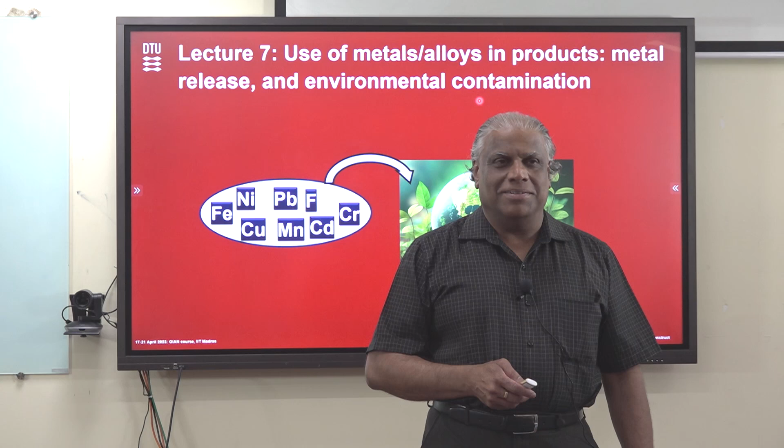So today we'll continue in the same way into some of the other areas. Again, the idea is the same: it's not to learn into details, but just to get an overview, so you know that these are some of the important issues. That's the idea behind it.

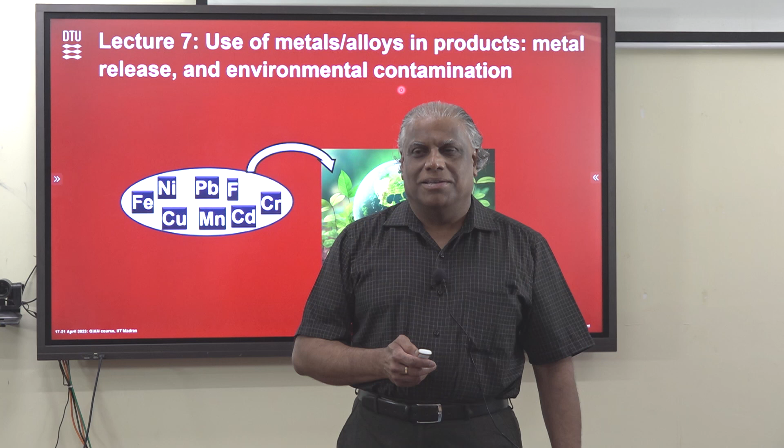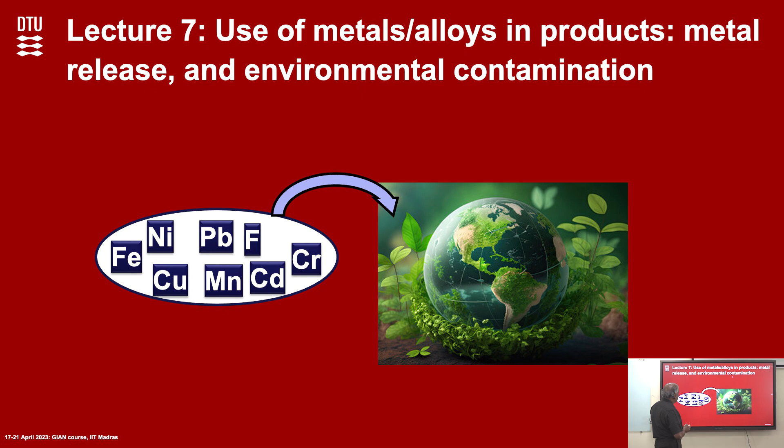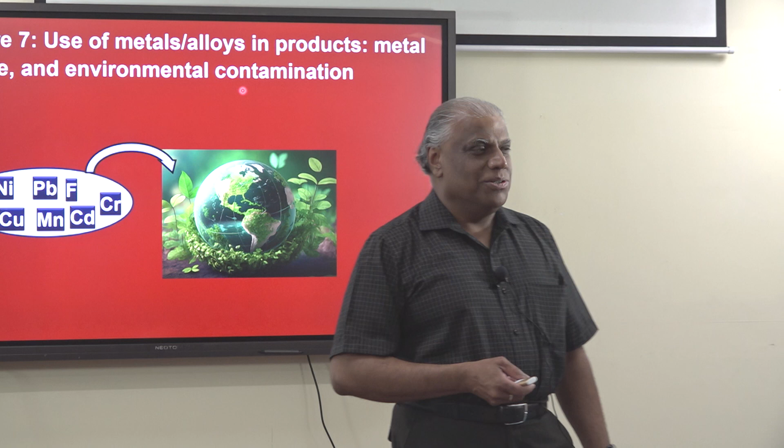So we cover two things today. One is metal release, because in recent times the use of metals and alloys in external products is increasing. If you look many years back at buildings, you don't see so much metal items exposed outside. Maybe in brass things like statues in India, or copper roofing in the West, but not so much other materials were used. But today it's not like that.

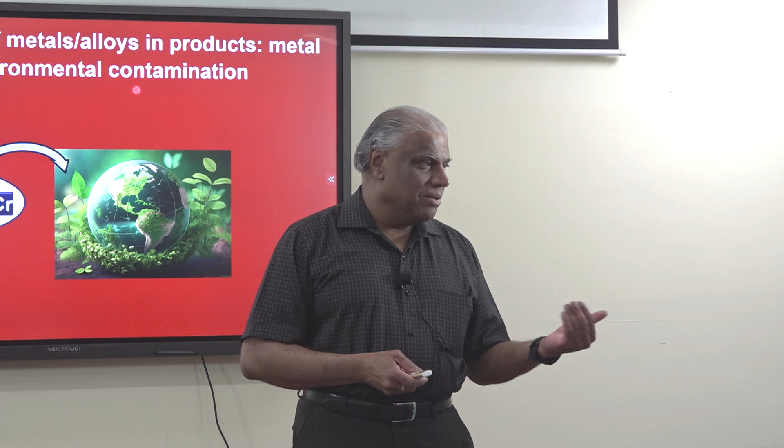Today there are so many metallic components used on the outside of buildings - aluminium, and in a normal building steel is used so much, of different types. There are buildings constructed totally using aluminium, and totally using titanium, and things like that.

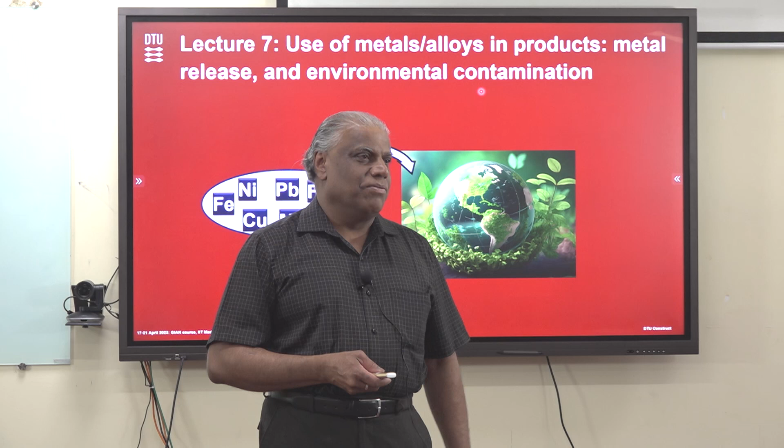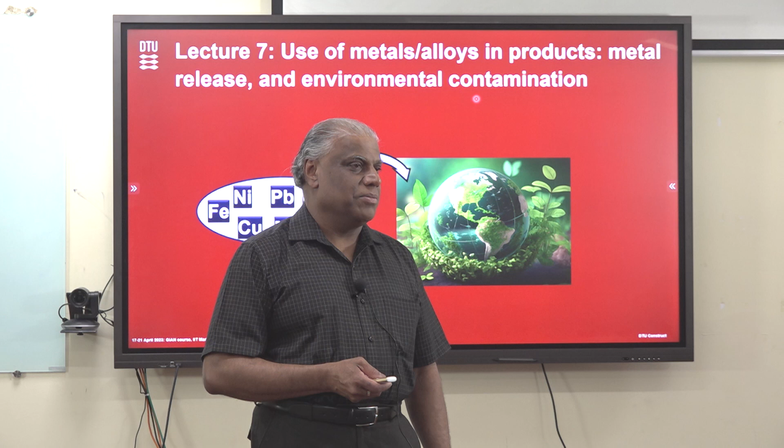Since there is a bigger area of metal and alloys exposed to outside conditions, there is more thinking about what is released from metals into the environment and how that will cause a problem. It can be poisonous. Some of the metal that is released can create problems for microorganisms, and if it creates problems for microorganisms, that means indirectly it will also affect us. So this is the thinking - that way people want to control this release.

Of course there are a few other things as well I will discuss here, to do with metal release also in biological systems - a little bit of an overview, because more and more materials are also used in contact with biological systems, and there too you have the metal release problem. So that's what we are going to look at a little bit.

Mainly the source of the metal is coming from architecture, that is from buildings, but it can also come from other things as well - mining, industrial sector, agriculture - and that can also release metallic ions, which come to the earth and also to the water, and that way it is a problem.

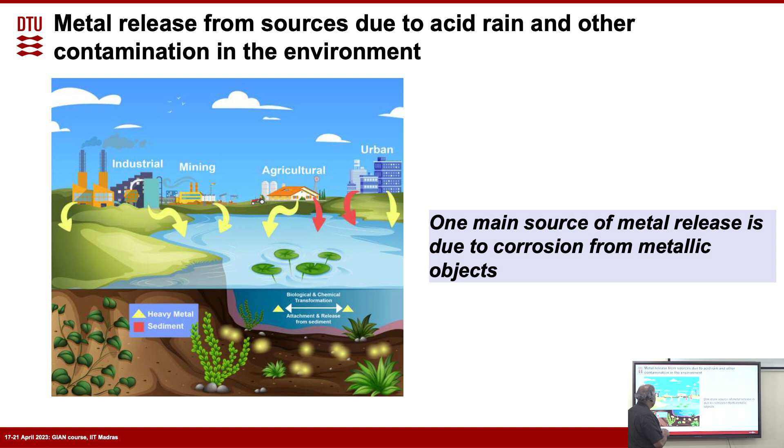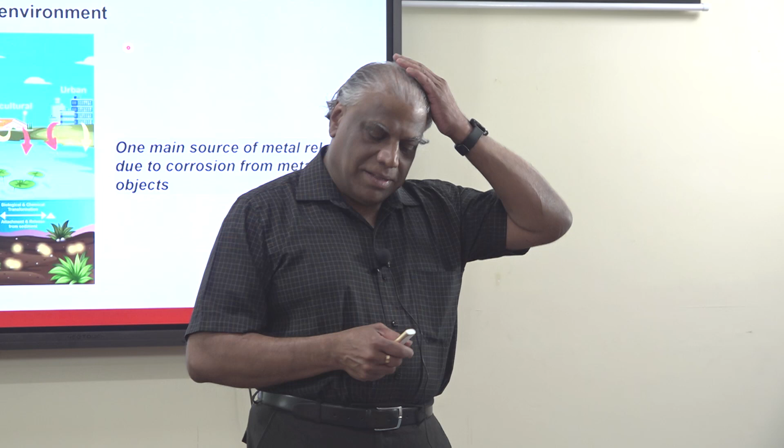But we are more worried about buildings, because in most cases the metal released from buildings is due to corrosion problems. It's a corrosion problem that is causing the metal to release, and that's more interesting for us, so that's what we will look at in more detail.

As I mentioned, the amount of metallic material used in building construction is increasing. You can see that if you take steel, about 43% of the steel is used in the construction sector, and there are many other applications as well. If you take some of these products, they are also getting exposed to the environment, and that way metal release is possible from these applications too.

Although we are taking the building application as the main thing releasing metal ions into the earth - for copper, you can see that the main application is building construction. This particular statistic is from the United States. Maybe there is more copper use in the West, probably compared to India.

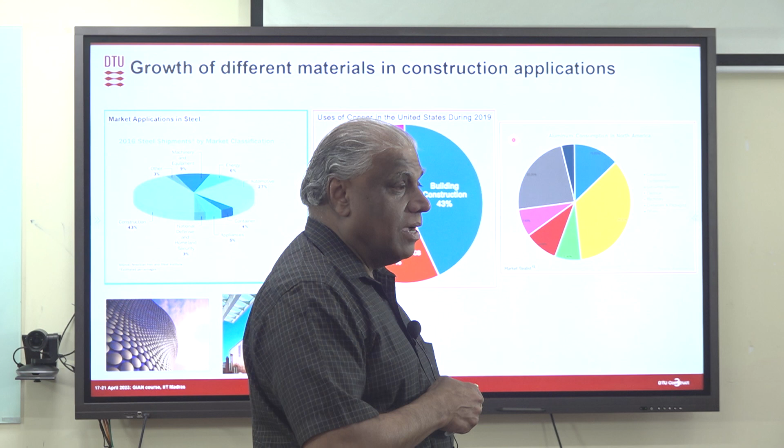Many times you will see that the tubing for water piping systems and other things in the West is made of copper, and roofing as well. So there is more use of copper in the West, and that's probably the reason you see here that a lot of copper is used.

Similarly, if you look at aluminium consumption, this part is coming from construction. The amount of aluminium used is a little lower compared to transportation, shown here in yellow. Transportation is the dominant sector for aluminium because of its lightweight, but aluminium is also used to a large percentage in construction as well.

Aluminium involvement in construction is increasing because of this lightweight property. You might think lightweight isn't important for static applications like construction, but that's not the case, because now we are making very tall, complicated buildings, and to install the metallic components you need cranes.

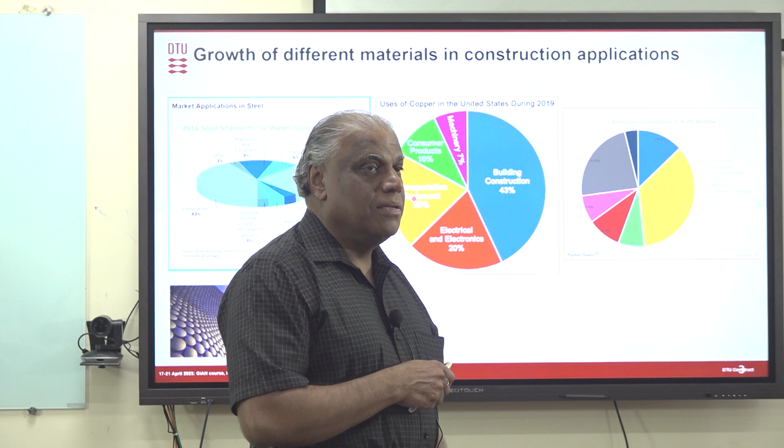Cranes are costly to use, and an aluminium component will weigh only one third of the equivalent steel component, so you don't need heavy cranes and other machinery for installation. So installation cost is much less if you build with aluminium compared to steel. That's why aluminium is entering more and more into construction, especially offshore construction.

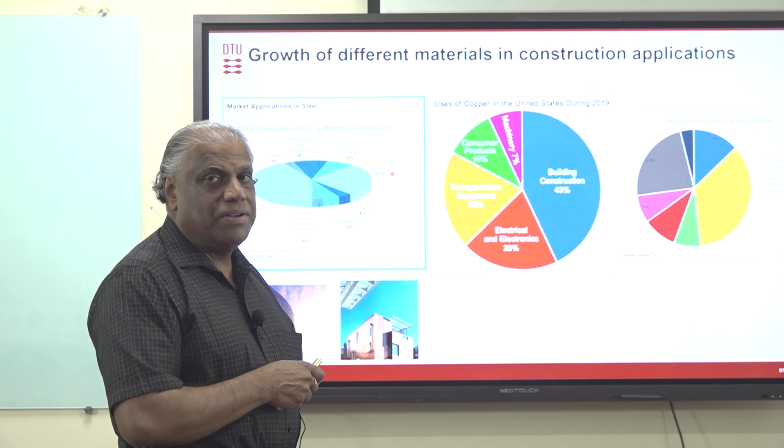Earlier, in offshore oil platforms, mainly steel was used for accommodation modules and similar structures. Now everything is changing to aluminium, basically for this reason—it can be easily transported, which reduces cost.

So just to give an example, I'll take a few different examples of metal release. This is one of the studies people have done on metal release from sources due to acid rain and corrosion.

This is a nice investigation from Guangzhou, a city in southern China with a lot of urbanization and industrialization. The air there is polluted, and that's a real problem because when air is polluted, rainwater collects pollutants like SO2 and NOx gases.

If water reacts with SO2, it produces an acid species, and similarly if it reacts with NOx gases, it also produces an acid species. So these issues are why the pH ends up being lower.

I took this from a paper looking at the dissolution of zinc, copper, lead, and cadmium, for example, and you can see a quite significant amount of this material is released at different sites. We'll look at that in detail shortly.

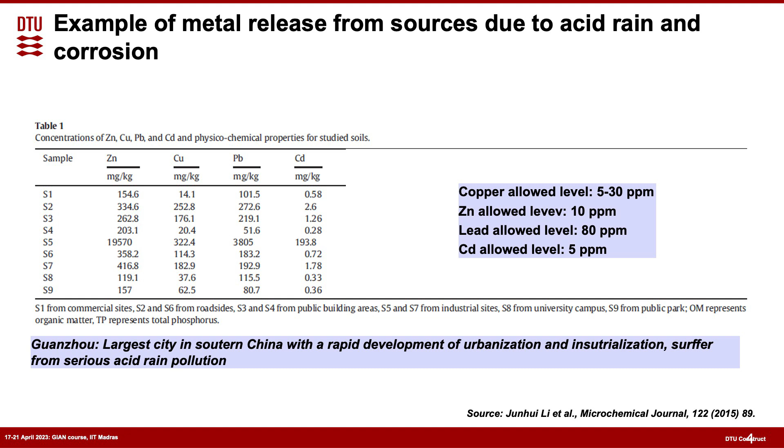So you can clearly see a pattern here depending on the type of place and exposure: where you'd expect higher pollution, such as industrial sites, you get a much higher degree of this release compared to other regions.

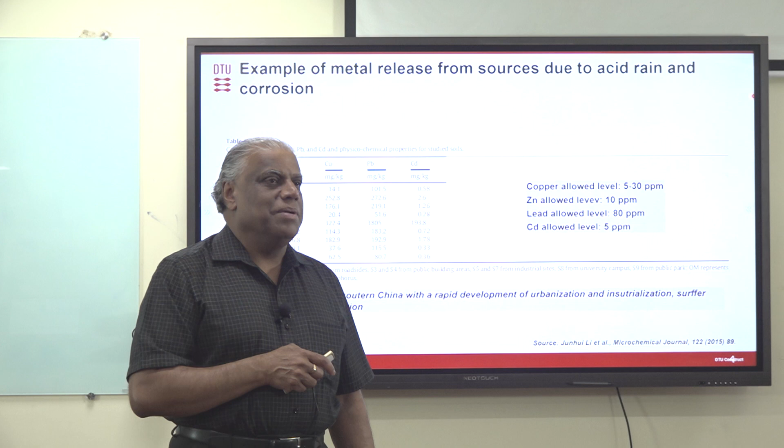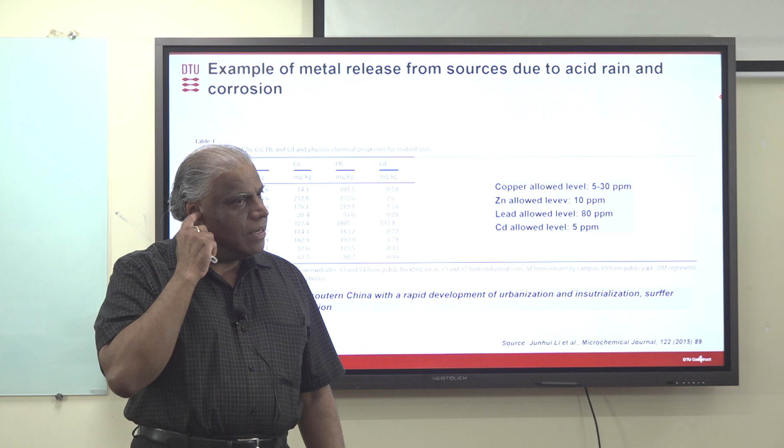This is a side that people are worried about, and this needs to be controlled - that's the kind of action which you need to take. I don't know to what extent you have this thing in India, but at least in the West, it is very seriously taken, and there are strict rules for using metal items for building constructions. One of the universities, which will come later, did a lot of work in this area. They started giving consultations, so that anybody making a building could consult them and get suggestions for better materials to reduce this problem.

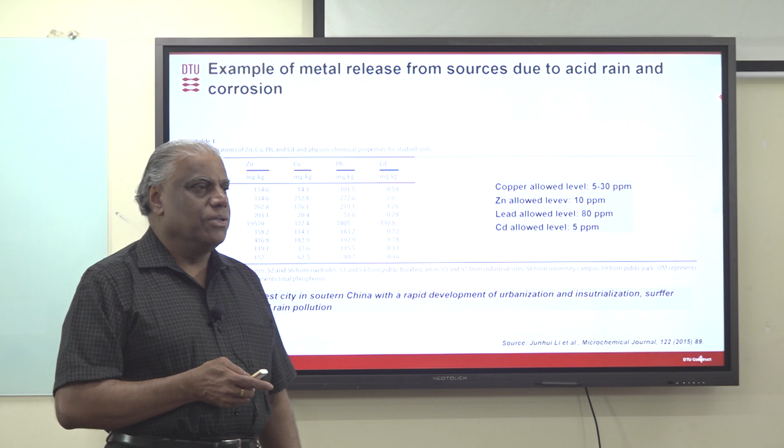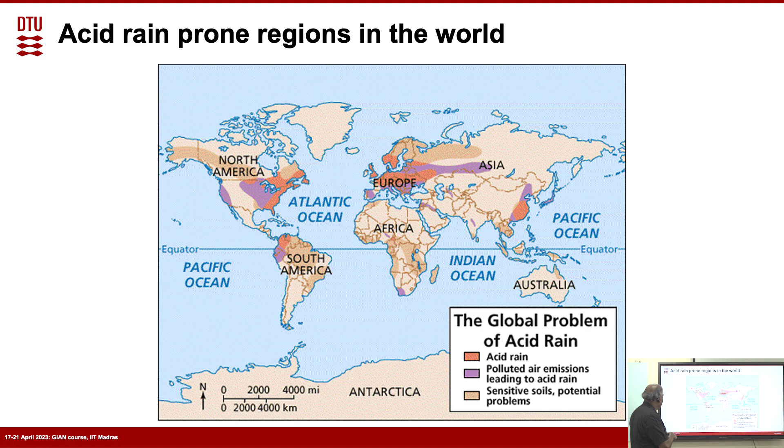But if you look at this graph, you don't see that. Of course, this may be a slightly old graph, so there may be slight changes, but you don't see that here. You can see that Europe is one of the places with a lot of acid rain, and you also see it in North America and part of South America - that's the region where you see a lot of acid rain.

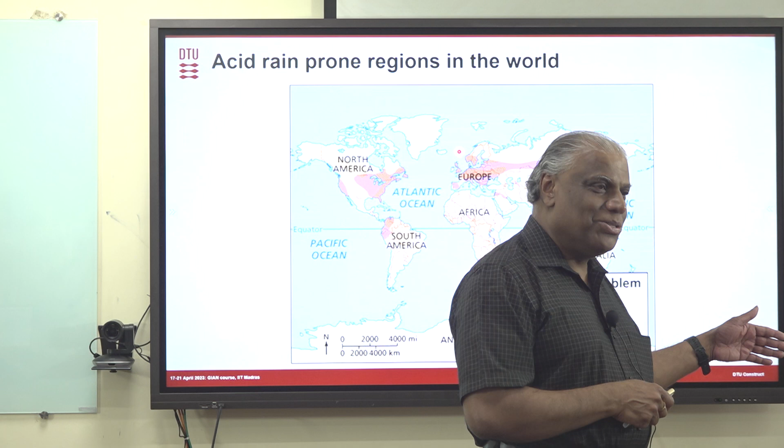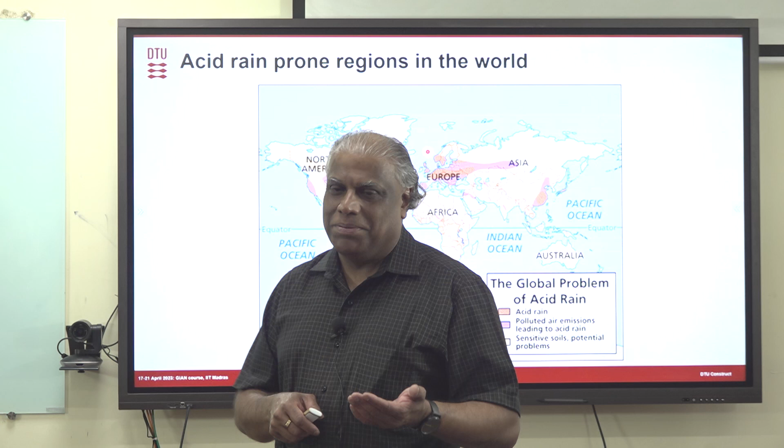So that goes back to history. That means the acid rain you see now is not totally to do with yesterday's pollution - it is coming historically, from over a long period of time. The Industrial Revolution started in Europe, so many industries came up there, and a lot of pollution was already done at that time, because the restrictions were much less then. So that makes much more acid rain.

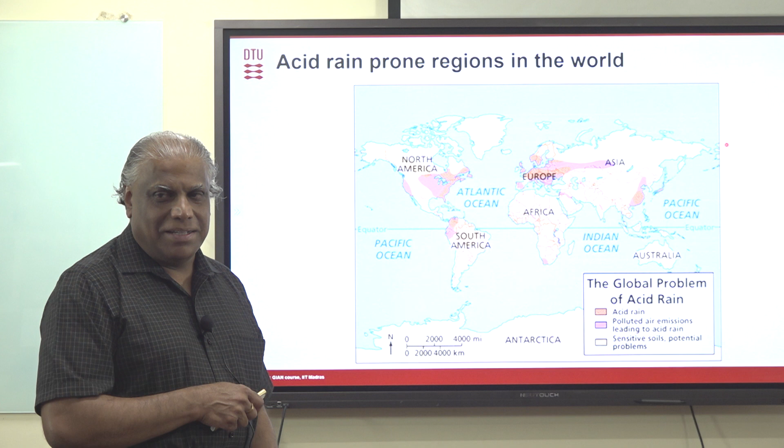So now you can see why Europe is more worried about it, and why there are more acid rain chances in Europe. It is probably coming down now, because over the last many years there have been much more restrictions, and that way the pollution is less, so probably the degree of this is coming down. But in general, there is more pollution and acid rain chances in Europe.

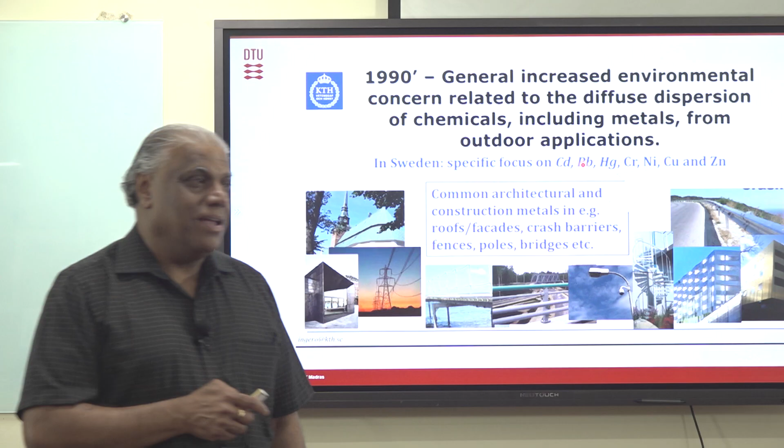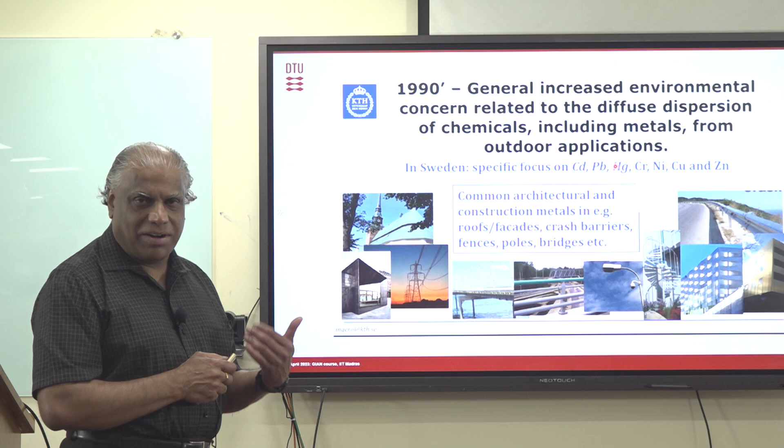KTH has done a lot of study from the corrosion point of view and the electrochemical point of view. KTH is the Royal Institute of Technology in Stockholm - in Swedish it stands for a different name, that's why it's called KTH - but it is like my university, like DTU or IIT. They only have technology, engineering, science and management, not much else. It's a similar type of university, and they have done a lot of work in Europe understanding what kind of metals can release from buildings and what problems that causes. So that's what is written here, I took some slides from them.

Generally, increased environmental concern relates to diffuse dispersion of chemicals, including metals, from outdoor applications. This was the kind of case which came up in Europe within the 80s and 90s, and they did a lot of work in this area, looking into what could come out from different buildings.

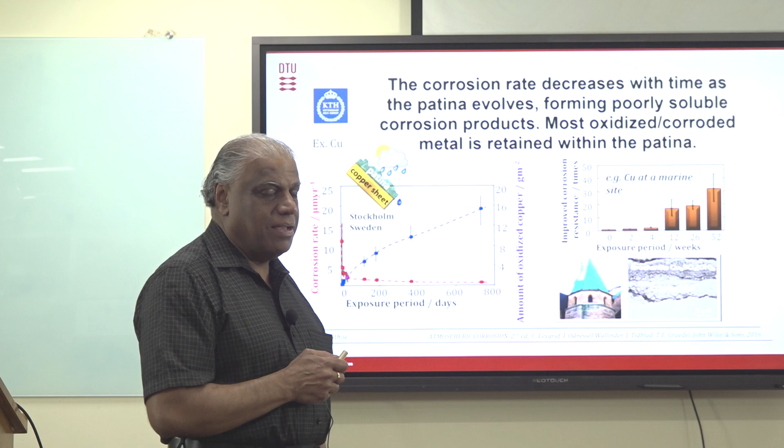One of the major things they studied is the release of copper, because there are a lot of copper roofing buildings in Europe, and it is totally covered with patina. That means the corrosion rate of the copper will be lower with the patina, but the problem is that this patina itself is soluble in lower pH conditions. So it's not that copper is corroding more, because copper is not exposed - the patina is the one exposed to outside conditions, but the patina itself is soluble if the pH is lower.

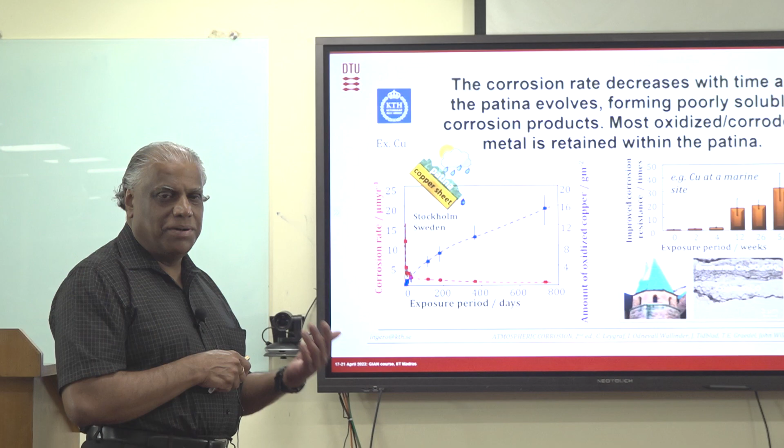So here you can see an experiment they did outside, for example, taking a copper sheet and exposing it from outside for around 800 days - that's about 2 years or more. You can see that the copper oxidation rate comes down very, very fast. And very fast doesn't mean within 1 hour or something like that - within a few days, the copper oxidation rate comes down.

And that is because this patina is forming the amount of oxidized copper. Oxidized copper doesn't mean that's a patina, but at least the oxidized copper is forming, and that is increasing with the time. And this slowly changes into patina, and that's what happens in all these places, if you take this copper roofing. And this is also what it says, that is improved corrosion resistance over time, because this copper dissolution rate is reduced as you have an increase in the corrosion, this patina formation and things like that. So that is naturally what you see in the case of copper, because patina is forming, and that way this dissolution rate is decreased.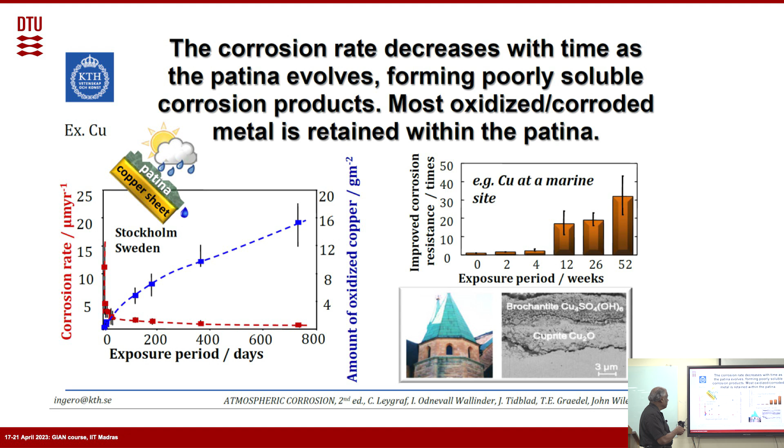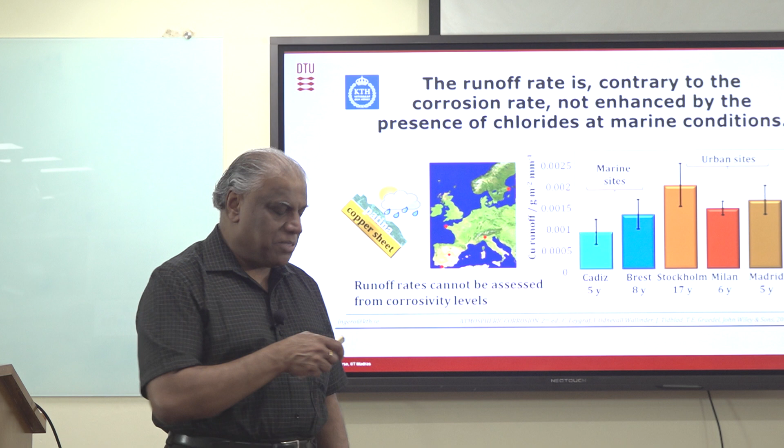The runoff rate is lower in the marine site, because usually we expect the other way. The marine site is having a lot of chloride conditions, and we expect that marine sites will give much more runoff. But here it is opposite. Actually, it is city areas which give much more release. Again, it is coming back to the same thing, because city area is more polluted with cars and things like that, and that way there is much more possibility of acid rain, and much more release in the cities compared to that of the marine sites.

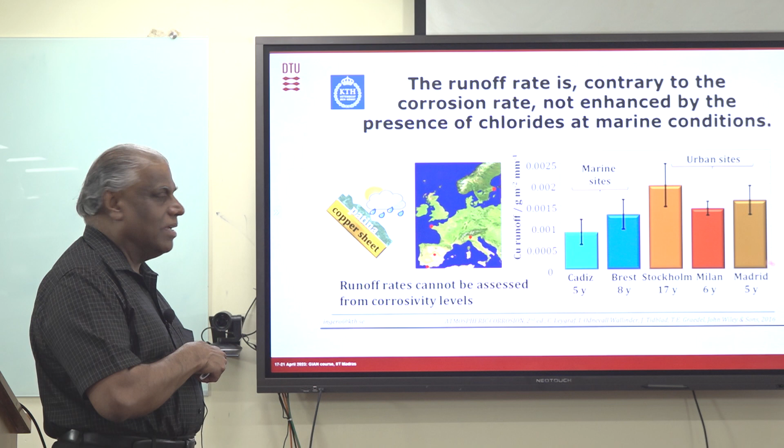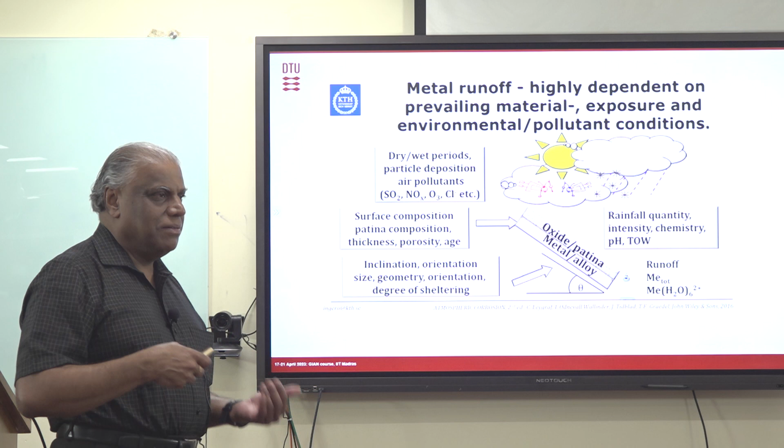So that's the importance of this urban atmospheric conditions you can see here. And then they also found that the metal runoff is highly dependent on the prevailing material exposure and environment pollution conditions. That means the dry-wet period is important. There is a dry-wet period, meaning you have a wet period and probably there is pollution and different things like aerosols that are deposited, and that also contains salt. And then when there is a wet condition, that increases this dissolution - all these gases and other species in the environment is important.

Surface composition of the patina depends on the metal, and the patina composition, porosity, and age - that's important, because if the patina is porous, not only will the patina dissolve, but also the environment will be attacking the copper. I'm taking copper as an example, but the meaning is the same for all metals, and that way again it increases.

Another thing they found was that the inclination is very important. Inclination, orientation, size, geometry - all these are also important, because it is runoff, right? This angle is important in this case. If it's a horizontal case, there is less runoff compared to if it is at a 45-degree angle or something like that the roof is sitting. So there are a number of parameters determining this - it's not just a simple thing.

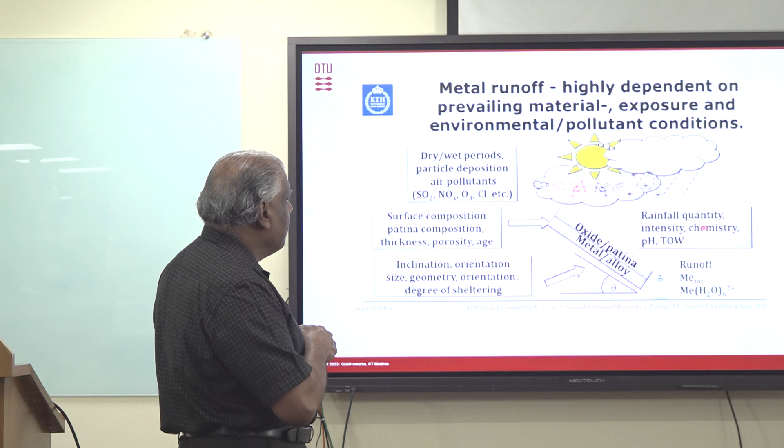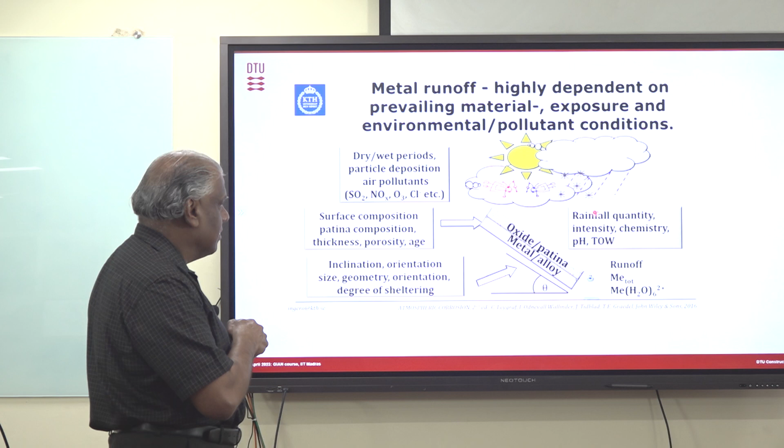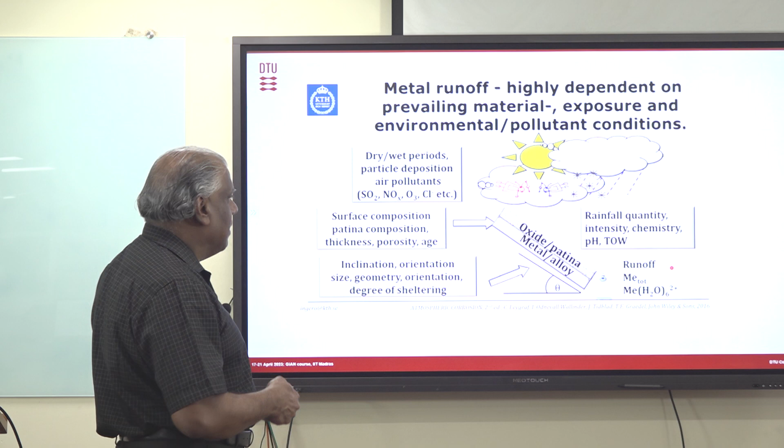And at the end, also the rainfall quantity and intensity, the chemistry of the rainfall - that is basically this acid rain, pH and things like that - and time of wetness. Time of wetness means it's not necessary that all the time you have rain - you have intermittent rain, but in between you have this time of wetness, like condensation. In the morning time you have cold weather, and that way you have condensation on the surface, and the condensation is slowly making the things dissolve. It may not be flowing away, but then when the rainwater comes, it is flowing away. So there are many factors that determine this flow, and that way this contamination.

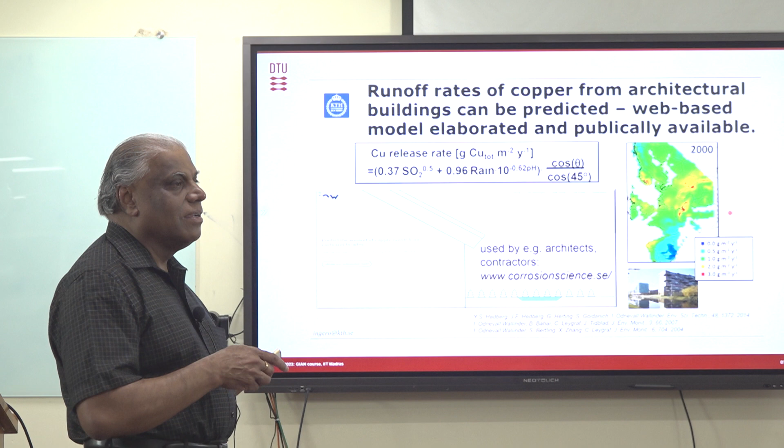Now they also started giving advice. This is a construction project where their knowledge and research findings have been implemented through discussion with material producers, urban construction offices, environment management, and property developers. They use alternate alloys because the designer wants a certain appearance for the outside, so there's a trade-off between what material can be used, how we can control the release, and at the same time getting the targeted appearance.

For example, in this particular case, they originally had the idea of using copper, but instead started using a copper, aluminum, tin, and zinc alloy. That way, the copper release was reduced by 40%. So that's an idea of how, if somebody wants to construct a building using a metallic material for aesthetics, you can reduce the release. This also brings opportunities, because this alloy probably didn't exist before—it was developed as part of this work, bringing opportunities for making new alloys with lower corrosion.

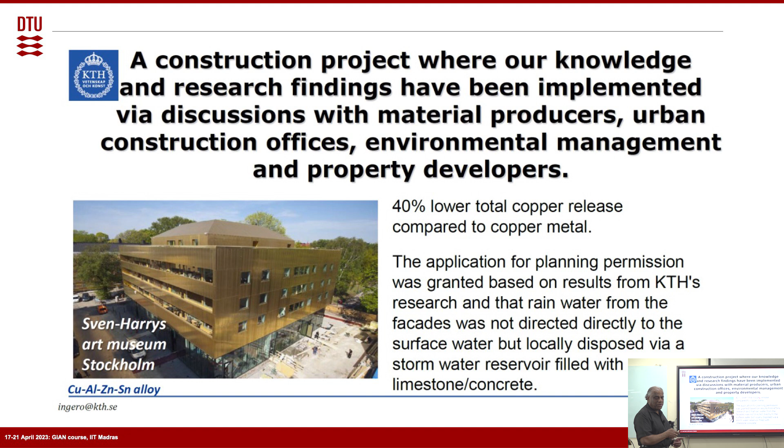So that gives you an idea of how important this is and what people do to understand it. They also studied the zinc runoff from the material, plotting the rate versus exposure period for zinc over about 350 days. You can see there are two data sets here—one is the corrosion data for zinc, and the other is runoff data.

Why these two? As you can see from this picture, because of the environment going through the patina, there is zinc corrosion occurring underneath here. You can also see there is zinc runoff happening on the top, which is coming from the patina dissolved in the acid rain and things like that, shown here for example.

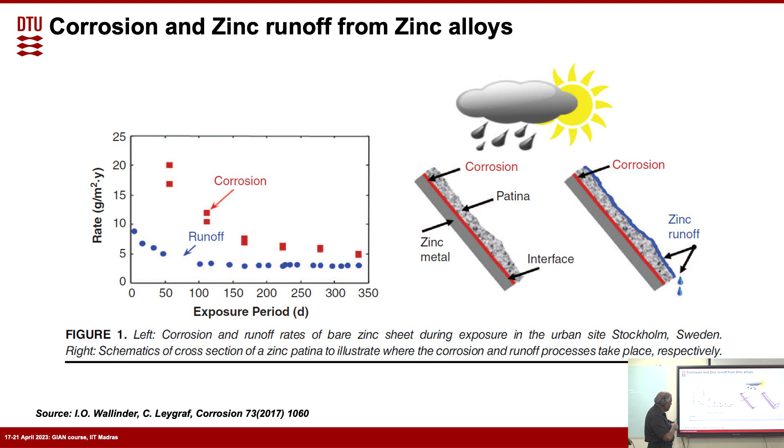This shows the corrosion rate of the zinc. If you take these two together, the zinc corrosion rate is higher initially compared to the runoff rate, because the patina is quite small. But you can see that with time, the zinc corrosion rate and the patina dissolution rate become almost the same, meaning it's reaching a steady state condition. Whatever patina is forming, that patina is dissolved as well.

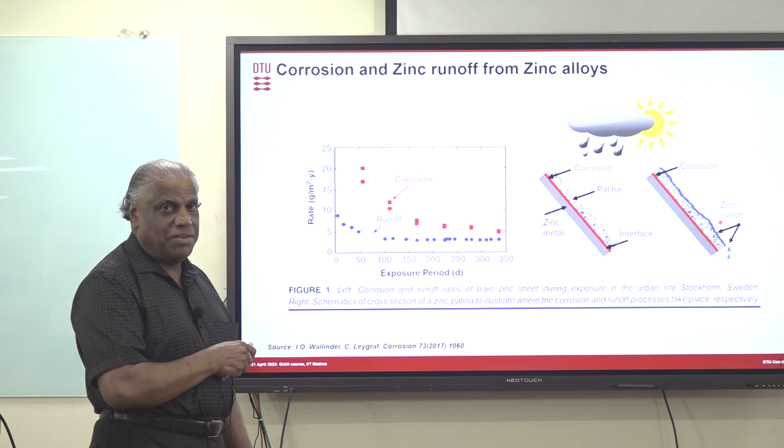A nice situation would be where the patina dissolution rate is lower than the corrosion rate, for example. Here it is equal almost at the end, and that is reaching a kind of steady state condition in this case.

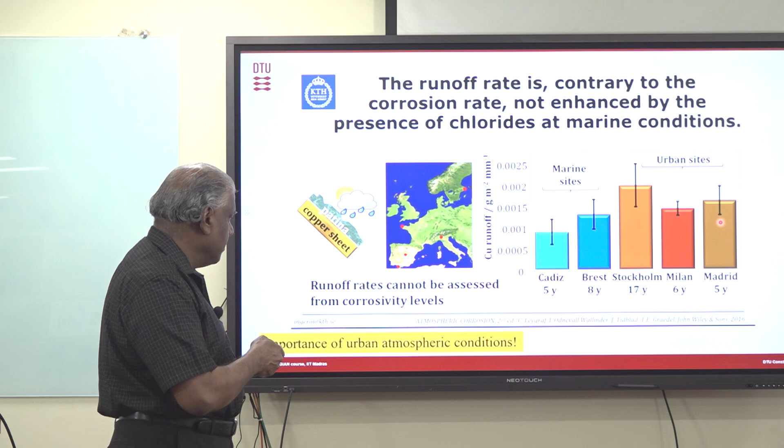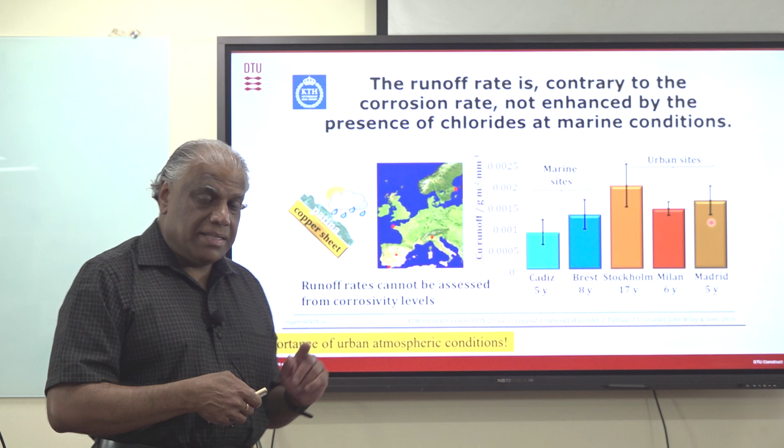This means more awareness and nicer vehicles, better cars and things like that, so the pollution is less, and because that issue is less now, the copper runoff rate has come down in Stockholm. But this is a kind of target, they also want to reduce this further. This is just from the same study, proposing the mechanism of this zinc runoff.

So you have zinc and galvanized zinc, and I think nothing complicated here. Zinc gets converted to zinc hydroxide first, because they analyzed the layer formation with time. Zinc hydroxide gets converted to zinc carbonate and hydroxide because there is carbon dioxide in the air. Then they also found compounds with chloride in it, a hydroxy chloride type compound with zinc chloride, which must be much more soluble in water compared to the other one because of the chloride. Then it forms a sodium salt, and then it dissolves into the water. That's the sequence of product formation: from zinc hydroxide to zinc carbonate, to hydroxy chloride, then forming the sodium salt, which dissolves into solution.

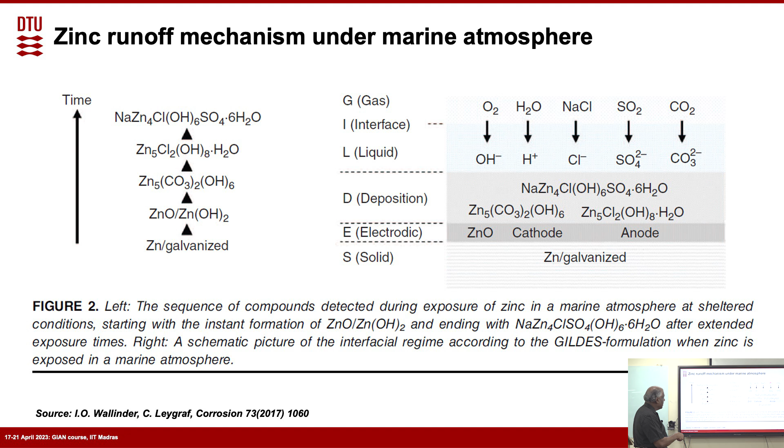That's what you see here with interaction with atmospheric conditions, where you have oxygen, H2O, NaCl, SO2, and CO2, and all those things. This is also from the same studies, looking at zinc corrosion and corrosion classes under different environments.

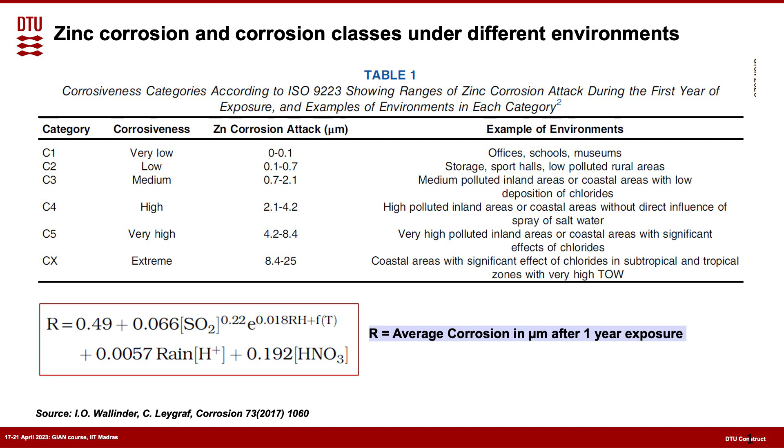You must have heard this name, probably Christopher Leygraf. Christopher Leygraf is a professor at the Royal Institute of Technology, KTH. He did a lot of work on atmospheric corrosion, and he has also written a book on atmospheric corrosion.

Here you can see another study where they took quaternary bronze and tried to see how it reacts in artificial rainwater, which they made with this kind of composition, maybe based on the analysis of actual acid rain. They collected and identified what the major species in it are, and that is shown here.

If you look at it, of course the pH, chloride is there always in the acid rain. Nitrate will be there coming from different pollution. SO4 is possible because SO2 is oxidized into SO4, or it's also possible from many other sources, and all these organic species coming from living organisms, that's how all these species are present.

And then they did the acid rain test, and they found what is more dissolved from the quaternary bronze. Again, you can see copper is the main element. This is for 48 hours, and this is for 30 days. You can see copper is one of the major species dissolved from the quaternary bronze.

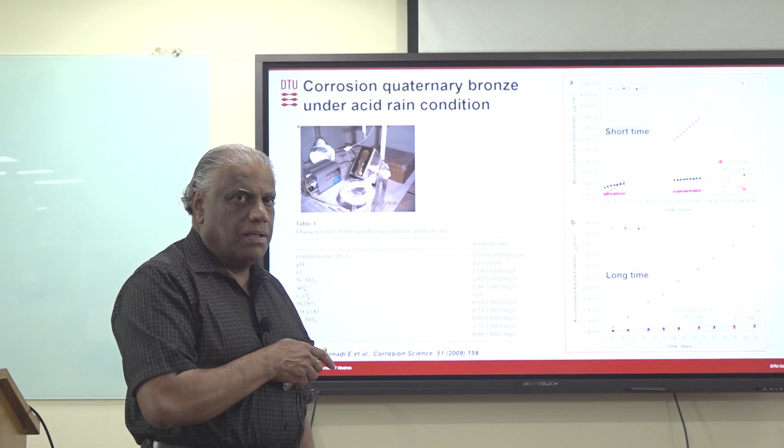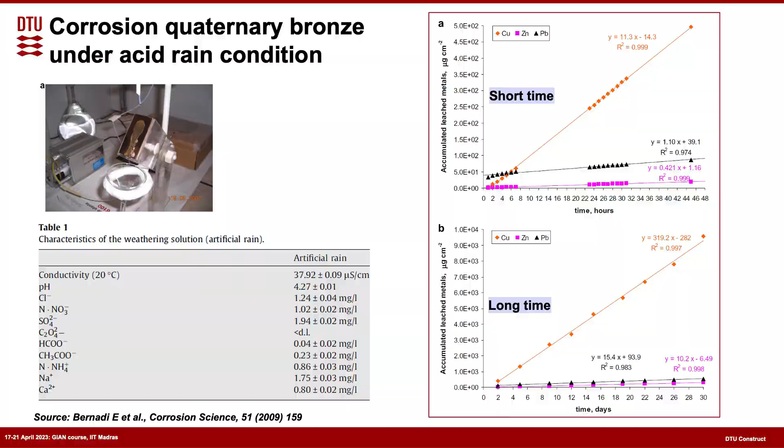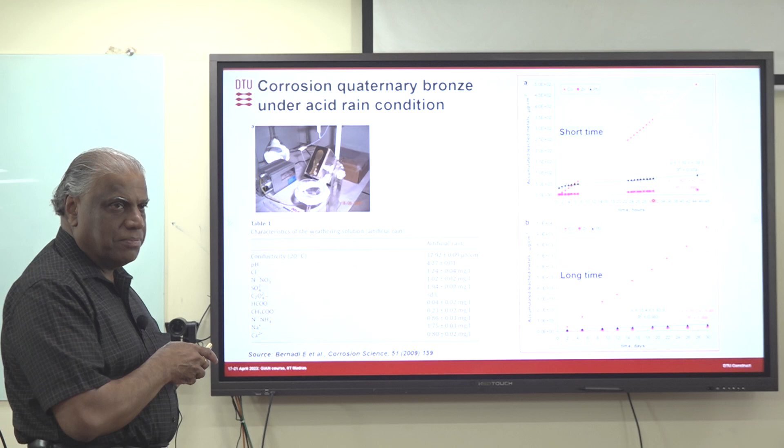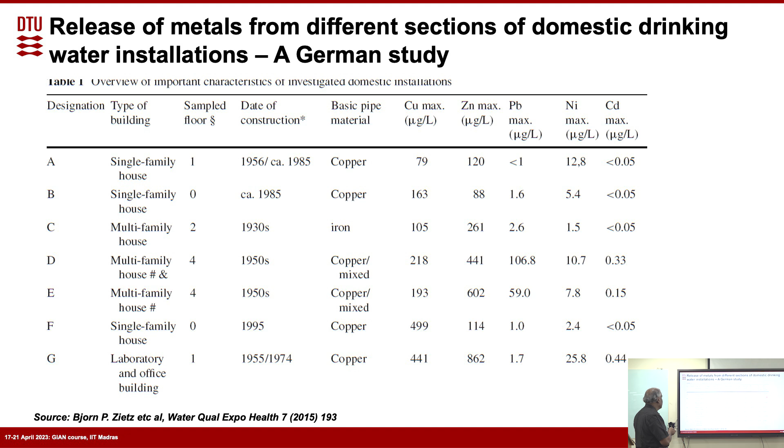This is another study coming from Germany, which they have done. As I mentioned, a lot of copper tubing is used for water supply and things like that in Europe. So they are also looking into that in family buildings and things like that, the kind of release of copper and different materials into the water. So this is another possibility, when you use tubing systems with copper, the metal is dissolving into that and contaminating the water, for example.

As I mentioned, metal release into biological systems is also important. So people also started looking into metal release into biological systems. Stainless steel is widely used for biological applications, and many things can be released into the biological media as well. The food industry is another area where stainless steel is used so much, and food contamination is another issue with very strict regulation on it. For example, this particular study took different biological fluids and tried to understand the release of these elements from stainless steel in different solutions.

The interesting thing for us is that iron is dissolved more in all these cases. That's understandable because these are iron-based alloys. You can see that a little bit of chromium is also dissolved in all these cases, this gray color part. More interesting is the nickel release. For example, nickel is a very allergic material, and many people get metal-contact related allergy, nickel is one of the really allergic materials. So that's very, very important.

Most of the time when stainless steel is used as an implant in the body, people get allergy. That's because of nickel release. You can see that in some of the solutions there is higher nickel release. We won't go into that detail, but we can look specifically at the chemistry of that solution. But there is nickel release almost all over. And that's a worrying thing actually, because nickel release causes biological problems, because it causes a lot of allergy.

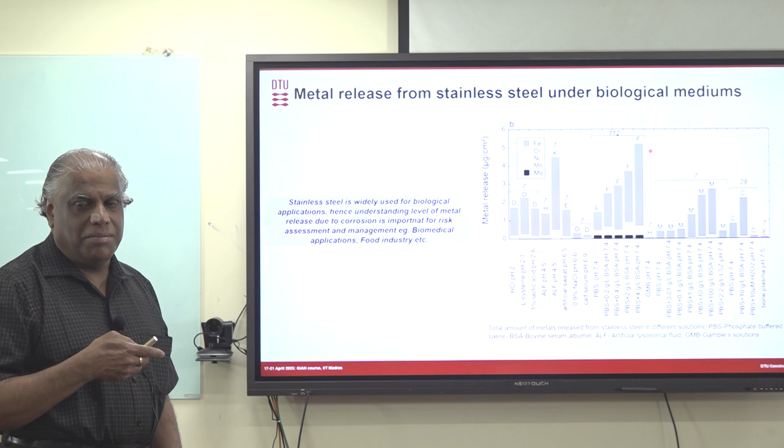There is a study, not done by me, but by one of my colleagues in Denmark, and it was published together with one of the hospitals in Denmark. I don't know whether any of you have had this problem: if you take the old Apple computers, when you touch them, you start getting an allergy, a reddish color and itching. Not the new ones, but the old Apple computers. And the reason for that was, do you know how this Apple computer frame is made, which I was telling you yesterday?

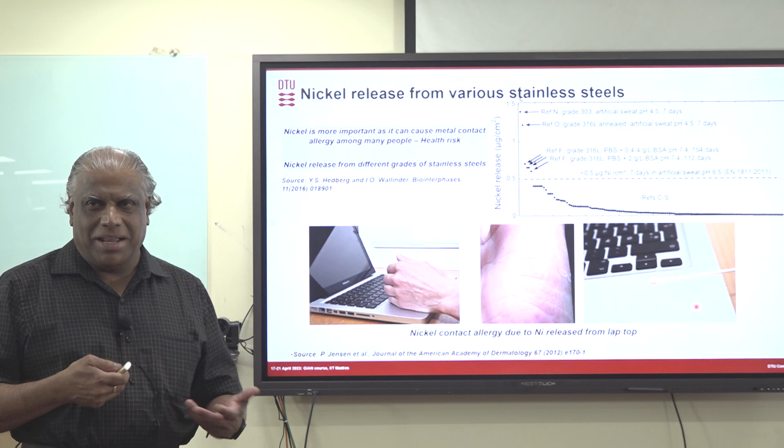It's aluminum, right? And aluminum, and it is anodized. After the anodizing, they do a process. During the anodizing process, you form a porous outside layer—that's how the anodized layer is formed. After that, they do a sealing process in order to close the pores. So the anodization is like that: anodizing, and then a sealing process to close the pores.

There are different types of sealing processes people can do. You can do cold water sealing, hot water sealing, and people also started using nickel sealing. Nickel sealing gives a little bit more corrosion protection compared to normal sealing. So Apple computers used the nickel sealing process,

but they didn't think about the allergy issues. Whoever bought Apple computers, many of them, when they used it, had these allergy issues. And it was a big problem for Apple to solve, because in the West it's a big issue—they can go to court and say they need compensation. So it was a big issue for Apple to solve.

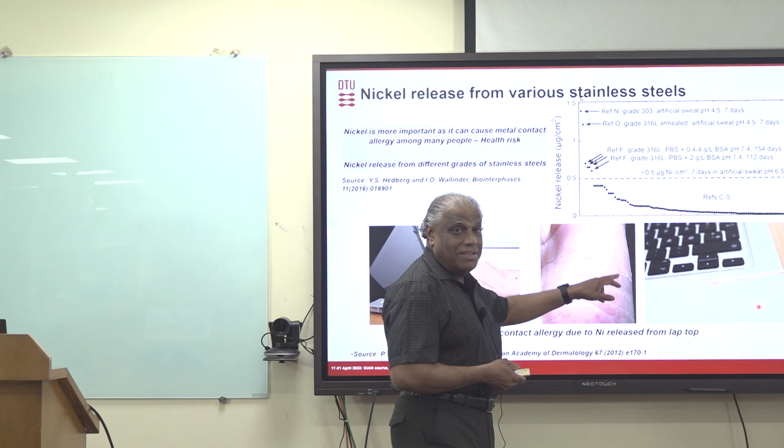So you can see that this is a kind of allergy. There's also another thing—I don't know the reason, and I don't think anybody in the medical world knows the reason for it either—that in the West, metal contact allergy is more common compared to Asia. Maybe because of differences in the skin, and probably because we have maybe more melanin, or I don't know the exact reason, but whatever it is, this allergy issue is much more common in the West, and more people got affected there.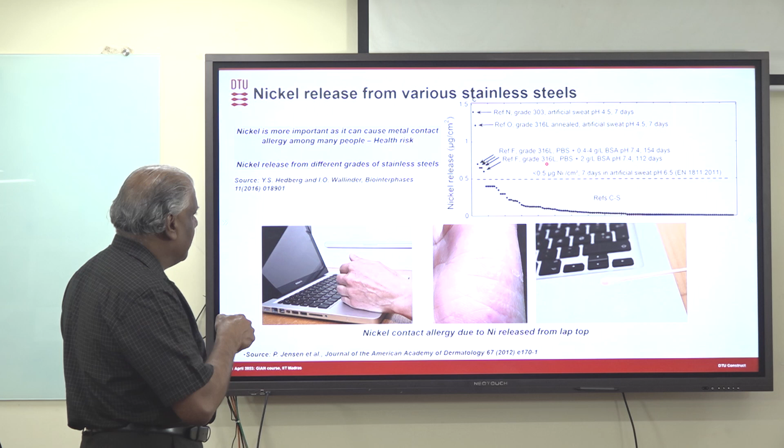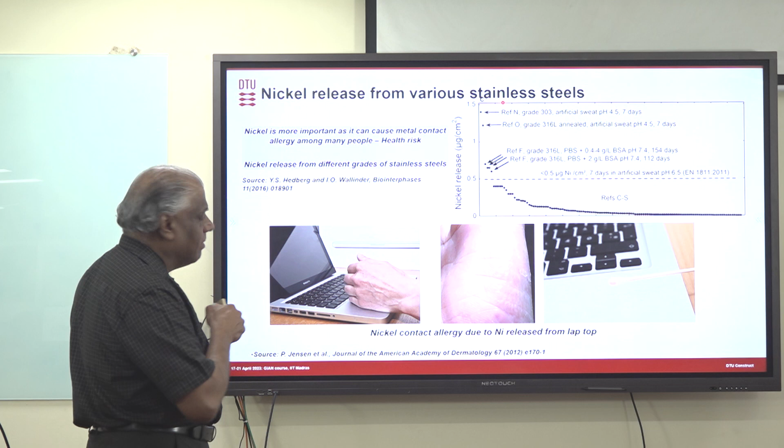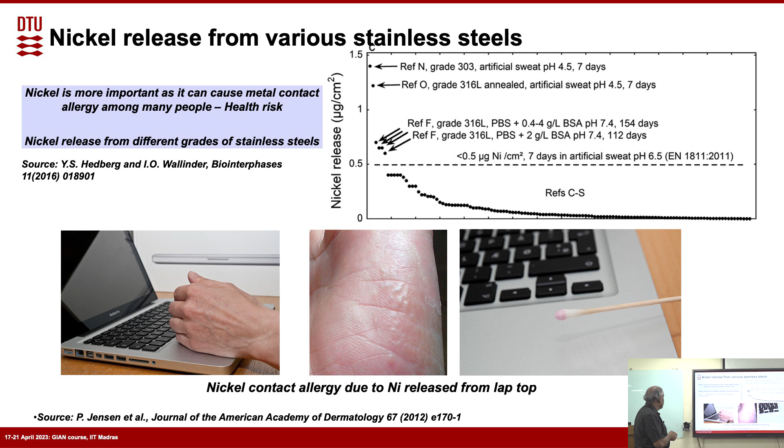Now, of course, they removed the nickel and don't use nickel sealing anymore. That's what is shown here as well—if you take artificial sweat and different types of stainless steel, you can see how much nickel is released. This shows the allowed nickel release rate and how much nickel is released from different materials, including stainless steel. It can go beyond the allowed value, even from stainless steel. So now they've stopped using the nickel sealing process for Apple computers, you don't have any problem now, and they changed the process. That's an example of how problematic it can be.

This is another thing showing the metal release from the biomedical cobalt-chromium-molybdenum system. The interesting part is the chromium release here, because chromium is one of the metals you don't want released so much. You can see that with exposure time in this biological media, the chromium release increases—almost 3 or 4 times with exposure time. I don't have exact data here on how much chromium is allowed in the body, but that's a good thing to look into. You can see it is released from this cobalt-chromium-molybdenum alloy, and compared to stainless steel, the amount of chromium is also higher in this alloy, which increases the chance for more chromium to come out.

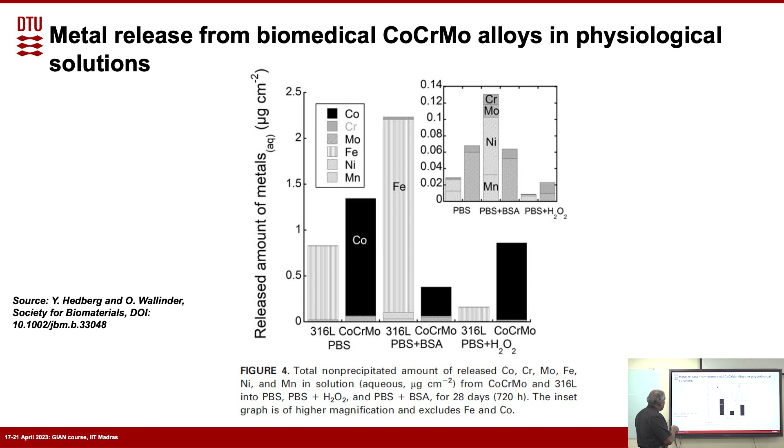This is a similar study showing how much chromium and different elements are released from different materials—more like a summary graph showing amounts of cobalt and chromium released. I think that's more or less what I have in this area.

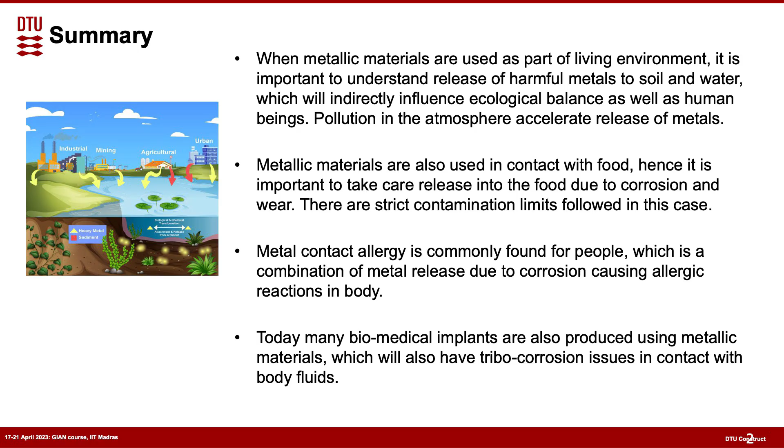Just to give you a glimpse: this is an issue, and people are looking at it from the corrosion point of view, in relation to biological systems and medical implants, as well as building constructions. It's important to look at, and people are trying to find solutions for it as well.

I think there's a lot of opportunity for this to be done in India, especially in relation to—I think you are also doing a bit now with these statues and things like that, right? But there's a lot of scope, because I don't think this research is done that much in India yet. So it's also a chance to initiate something like that.

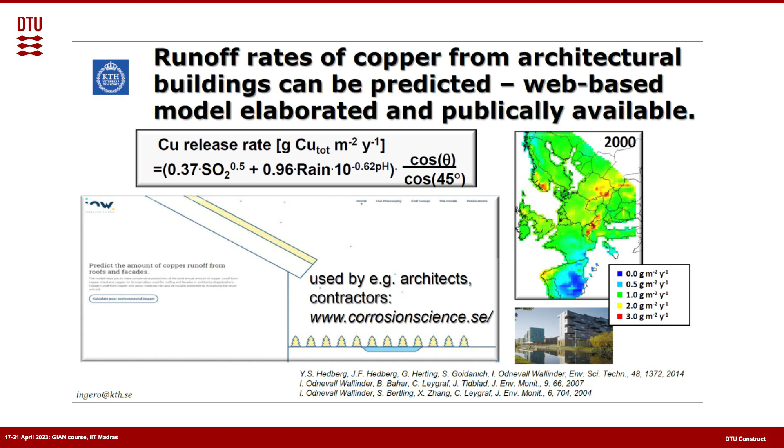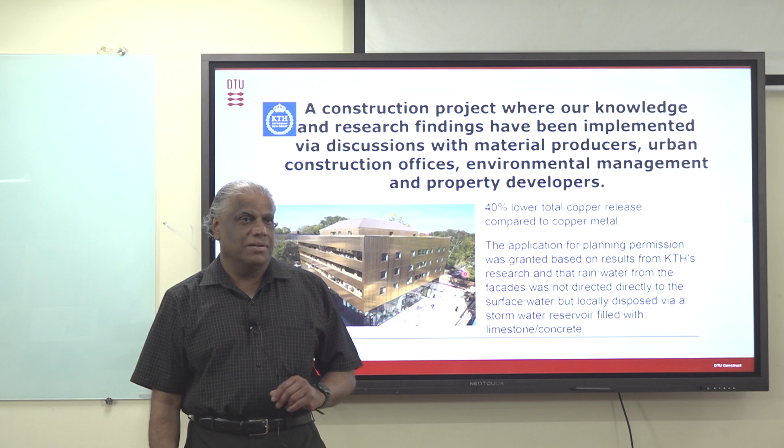I think that may not be the case here, but indirectly I can say it another way. For example, I don't think there is patina formation here, but indirectly we can say that's what they have done - by alloying like this, they reduce the release of copper. It's not patina, but it is like the reduced release of copper.

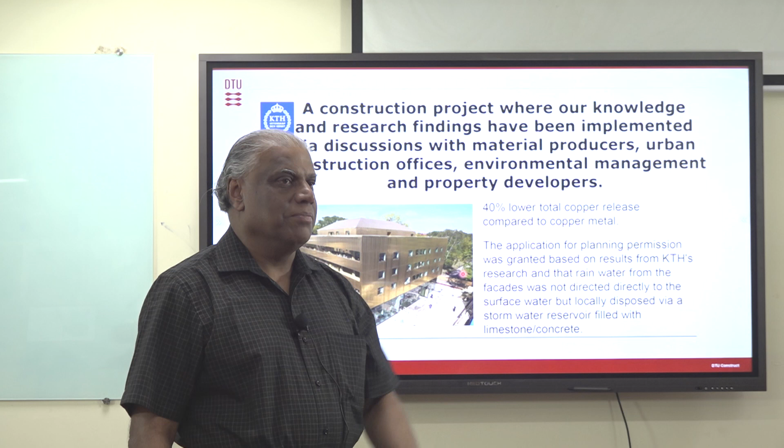I don't think you can do much with the patina composition itself, because that is formed because of the environment. The only thing you can do is make the environment clean. That's what I forgot to mention - there's another slide showing how the metal release rate has changed over time in Stockholm, meaning the environment became cleaner, resulting in reduced release. Otherwise, you need to attack with the alloy and use a better alloy.

That means the dissolution rate can be reduced. I think that's the approach more - not stabilizing the patina, because patina is a compound formed over the years. It is impossible for you to do anything with that.

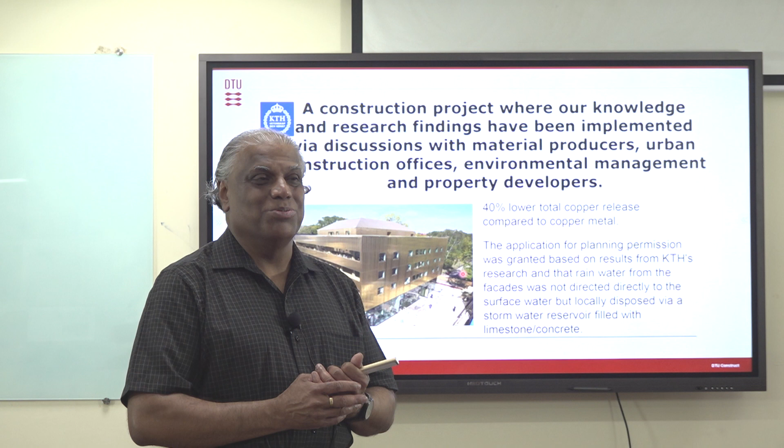Yes, maybe you can think in another way - you are going and spraying something onto this patina structure, and how feasible it is, I don't know. You understand my point - for every green colored building, you go and spray something that will stabilize the patina so that it can be reduced. But I don't know, if you look at it from a different point of view - commercial point of view and practicality - how workable it is, I don't know.

But it might be possible to find some chemistries, or even find some polymer compound which can be sprayed to keep the patina stable and things like that. So that might be possible.

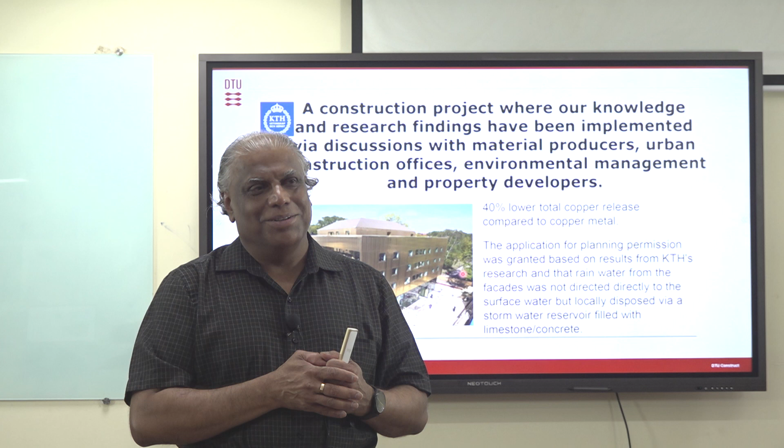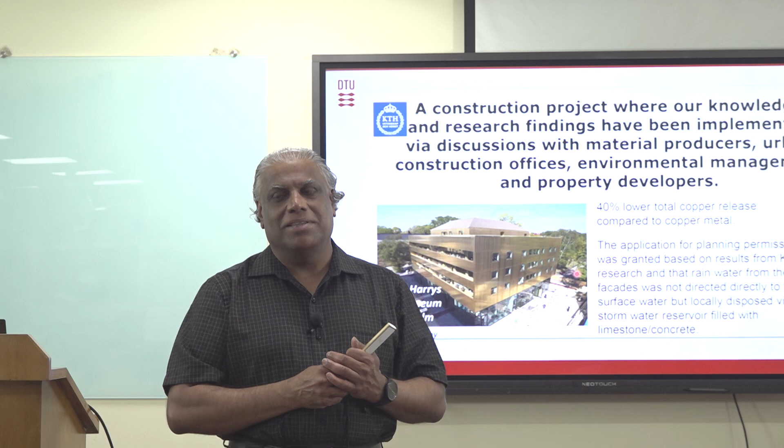I don't think, as far as I know, anybody is trying that. I think everything is going towards reducing pollution, because that's the drive anyway. You will see in my next presentation that they are trying to remove carbon dioxide and things like that from the atmosphere. So that's the way things are going.

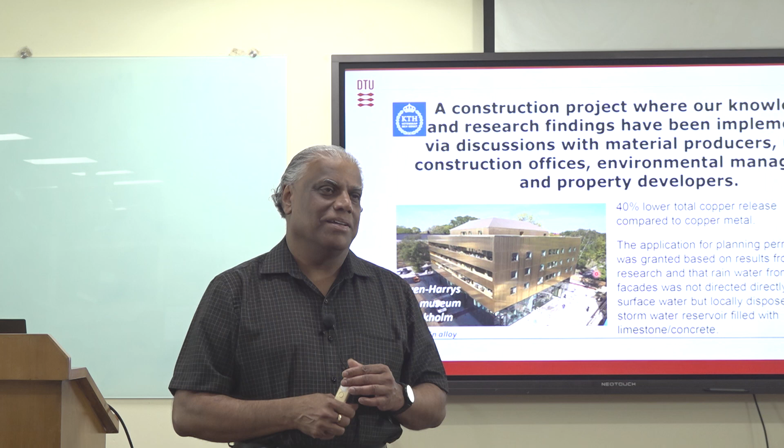Again, it becomes a question after 10 years or later - how to ensure a technology remains always a solution, not a question? That means you want to know if you have some technology, whether that technology will still be good after 10 years. It's difficult to say.

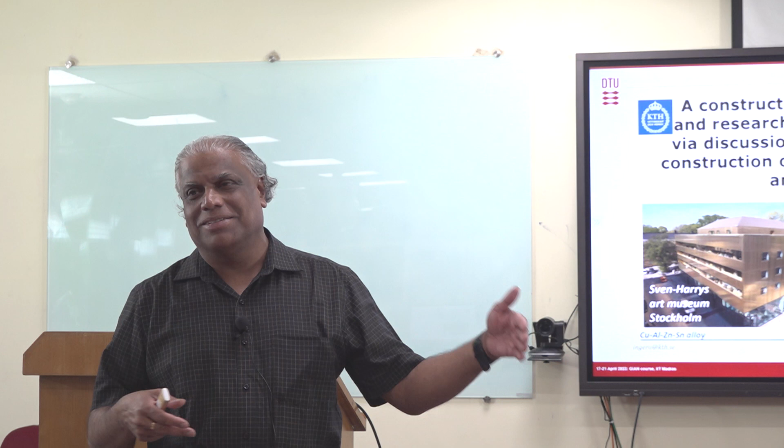The only thing is, with today's knowledge, we look at whatever is available - because compared to 20 years back, we have a lot of new knowledge today. With that, we have much more understanding of what metal is better, what is not good, and what is bad for the environment. That way we take decisions and make new technologies. But that doesn't mean these new technologies will not have any kind of issues.

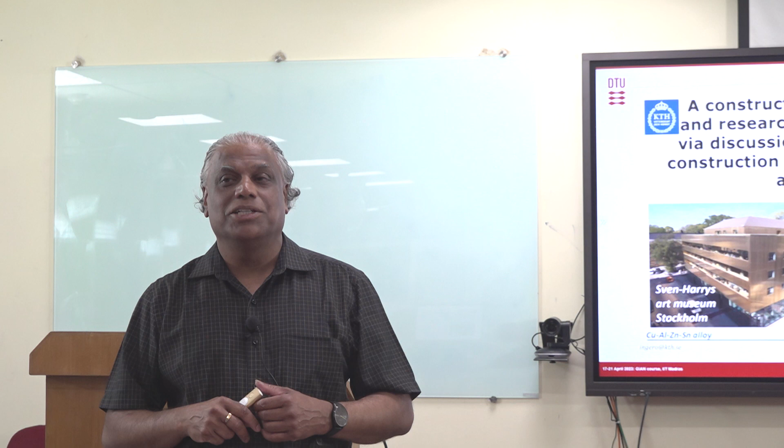We will find that out after 10 years. The only thing we can ensure is that problems coming from this technology will be much less compared to what we built 20 years back. That's all we can ensure. There is no guarantee that it will be perfect.

For example, they built this with this alloy, and the copper dissolution is reduced. Probably you will see some other things coming out of that, affecting things in another way - it's wild thinking, but similar for other technology as well. So nobody can completely ensure that a technology developed now will be safe after 10 years. With our knowledge, we can only say that it is better than 20 or 30 years back.